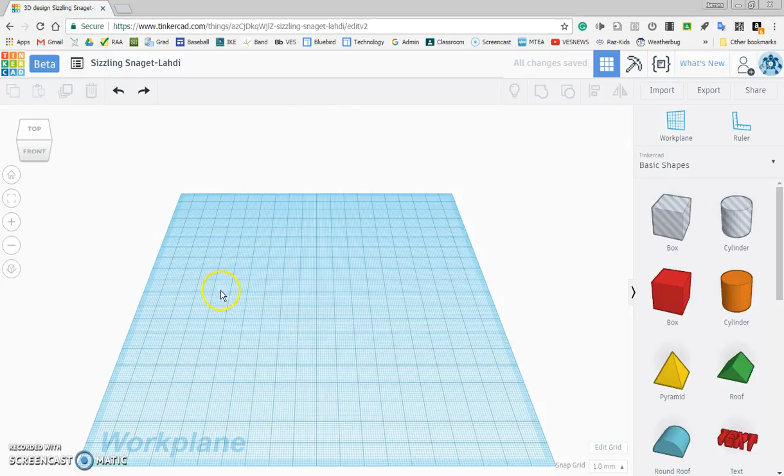What we're going to look at first is what's called our work plane. This is our work plane, that's where we build everything. To navigate around, we have a zoom in, a zoom out, a home button so if I'm really zoomed in or out I can click home and it brings me back. I also have a top view, I can rotate around, a front view, and so on. So that's one way to do it.

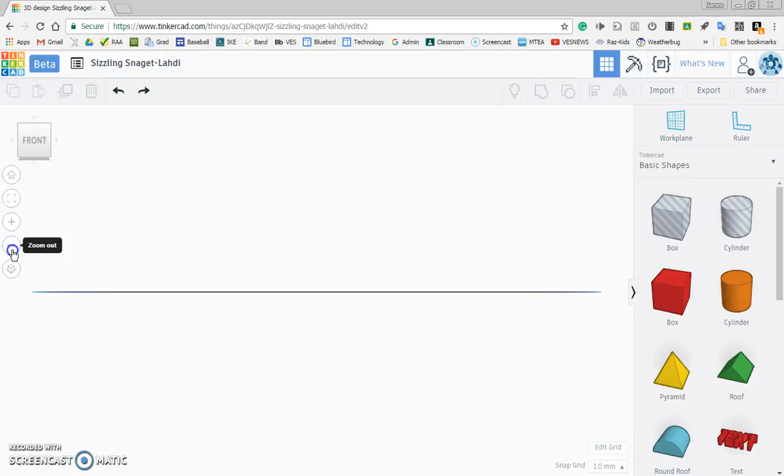The other way that I like to rotate around is by holding the right mouse button, which allows me to grab this work plane and drag it any way that I want. I kind of like that. And for zooming, I like to use the mouse wheel to zoom in and out. I find that a little bit easier, but you're welcome to use whichever way you like.

What I'm going to show you is how to create something pretty simple and easy to print to get started, and that will be, let's say, a nameplate or a keychain.

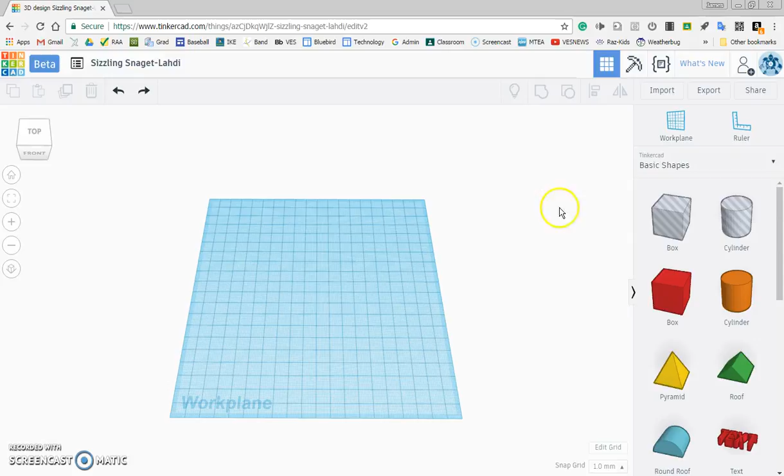I'm going to get all of my items from right over here. There's basic shapes, and you can even click the down arrow and there's a bunch of other things, but I'm going to stick with the basic shapes. I'm going to grab a box, click it, and drag it over here. Here's my box. If I rotate up, you can see it's standing right up on top of my work plane.

Just like a picture, my box can be resized. If I go to the corner, I can just drag it out. I'm going to make it about 36 by 85, give or take. This is measured in millimeters. I can drag it around my work plane.

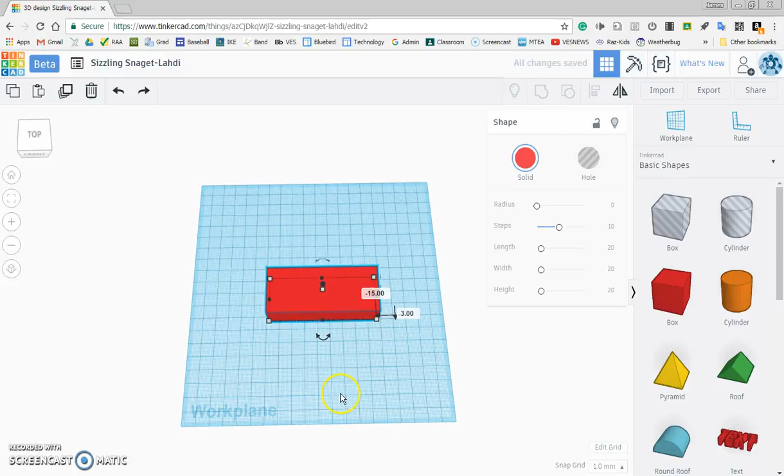I'm going to go back to a front view. I can see my block is pretty tall, so if I go to this little handle here, I can drag it down. I'm going to make it about 4 millimeters. That's all I really need for my nameplate.

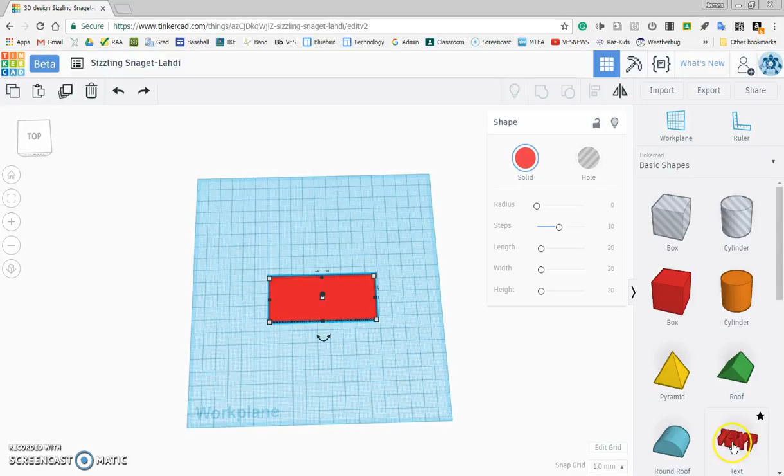Then I want to get some text to put on top of it. I can see some text right here, so if I click on that, I can put it right on top, like so. It's a little large, so I may want to resize it a bit. There we go. And obviously I don't want it to be called text, so I'm going to go in here, maybe I'll put Dolan - I can put VES or anything else.

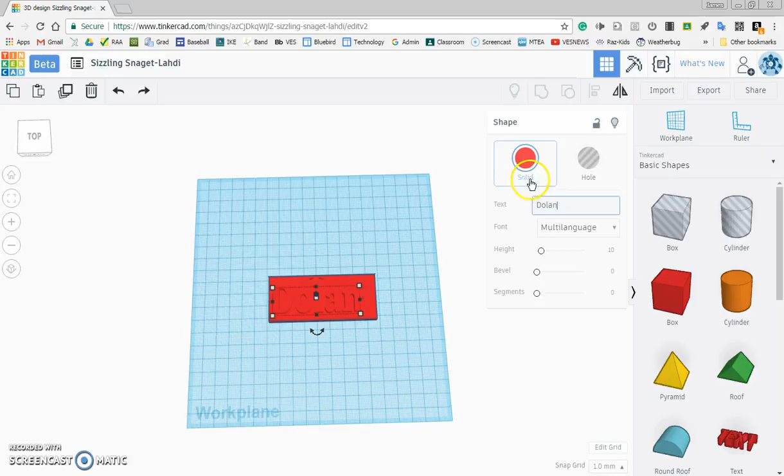The colors don't matter because we're printing on the 3D printer in one color, but just to make it easier to see, I will change it to another color. There we go. So I can move that around.

If I show you a little tour of my work plane, you can see it's pretty tall, so I may want to go in, instead of 10 millimeters, maybe make it about 6 or 7. And there it goes, that looks good.

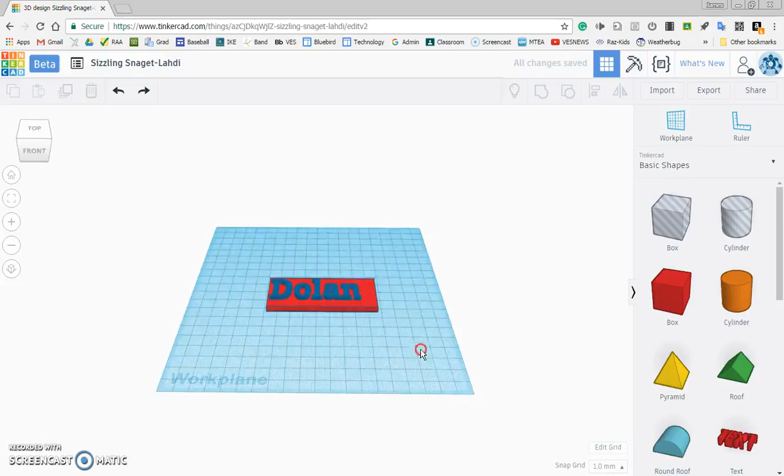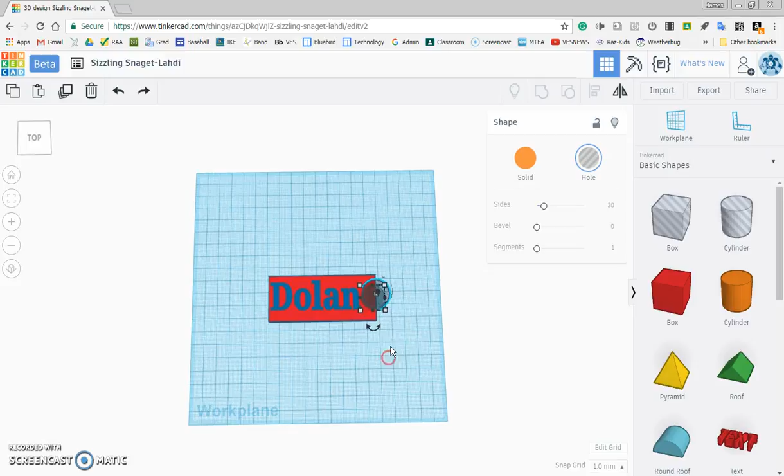Now to make it a keychain, if that's what I want to do, I would need a little hole over here to put it in. So if I grab one of these cylinders and put it over here, the only thing I see is, well, it's too big and it's cutting off part of my edge, so it wouldn't be a hole, it would actually be cutting off, and I couldn't put a chain through it or anything like that.

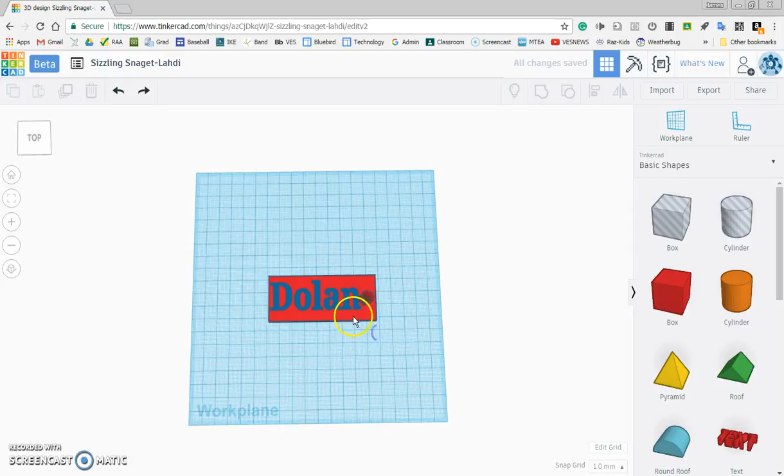So I need to make it smaller. I'm going to resize this, maybe making it somewhere around 8 or 9 millimeters, so that looks good. And I can move it over a little bit. It's a little close to my N, so I might make my whole keychain a little bit longer. Move my hole down a little bit.

Let's look at a front view. Ooh, I can see my hole's very tall, so I'm going to resize this and make it the same size as my bottom plate. So there's my hole. If I look underneath, I can see the holes there too.

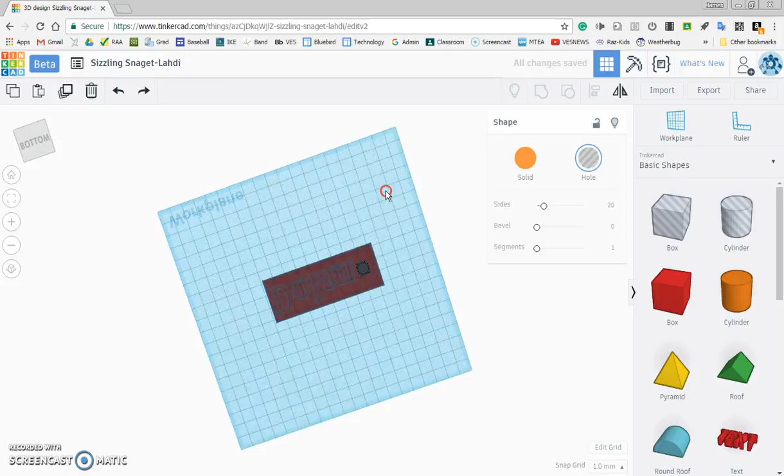And I have a nice little project that can be exported and printed on a 3D printer. Now, if you got more creative, you can look at some of the different shapes that you could add to it as well, and even explore all the cool things that are here.

But this is good. I should go up here and rename this. It gives you some crazy little name here, so I'm going to call it Dolan Keychain. And it saves automatically, which is wonderful.

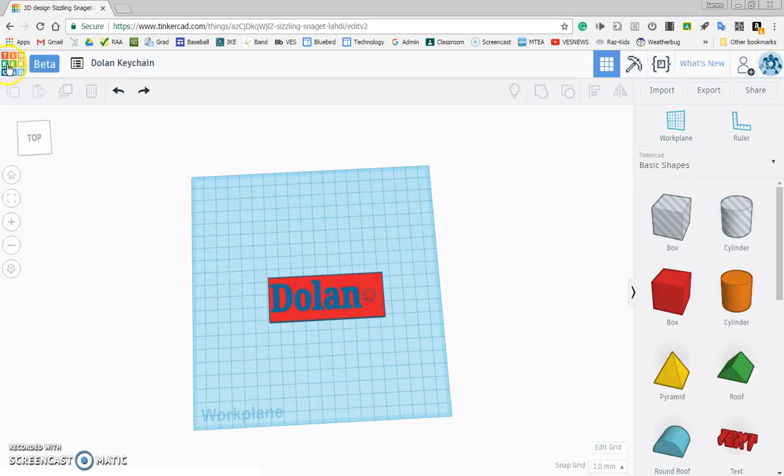And if I want to get back to my Tinkercad homepage, I can click right over here, and that will take me back, and I can see that everything has been saved. This was the latest one.